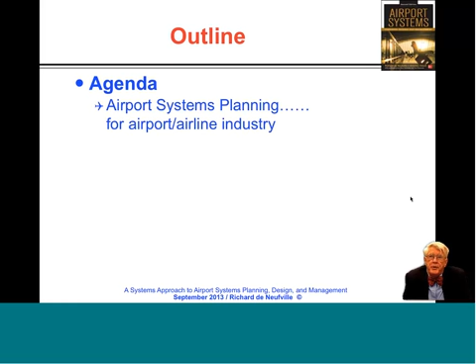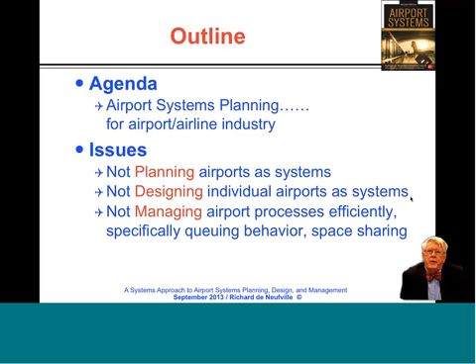The outline today is, first of all, I want to talk about the notion of airport systems planning for the airport airline industry, and cover several issues. The issues are basically that this is a field where they are not doing system design very much, and it's crying for your attention. In particular, they're not planning for airports as systems, they're not designing individual airports as systems, and they're not managing the processes efficiently, especially with regard to queuing behavior and space sharing. This is basically a field in need of a rethink, which is part of what my colleagues and I have been trying to do.

So the agenda item first of all refers to airport systems planning. Up there on the upper right-hand side, you have a picture of the book, and it's not so much the cover as it's actually quite thick. It's a wonderful book, keep your door open with it. It's a real door stopper, but it's trying to cover everything you want to know about airports and more.

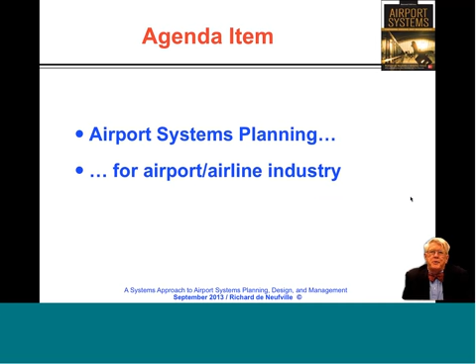So this particular one is a new text, in that it's the second edition, just came out in May. And it's new because it's about 50% rewritten from the original text of 10 years ago, and a lot has changed in the last decade. It's amazing how fast this field has been moving.

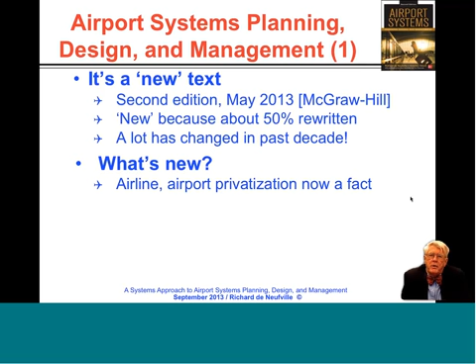What's new in particular is that airline and airport privatization is now a fact worldwide. This changes the game differently because the airlines now tend to compete on commercial bases rather than as an extension of flying the flag, whether it's Britain or Japan or France. And also the airports tend to have a completely different perspective when they run as businesses rather than government departments.

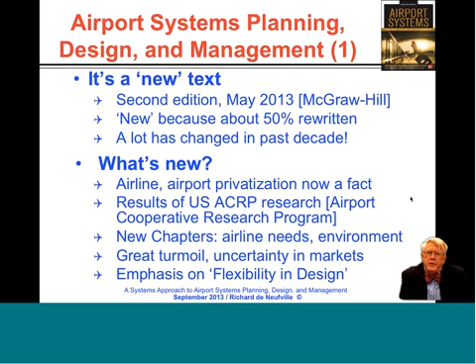There is also an enormous amount of recent research that's come out from the United States Airport Cooperative Research Program, and we cover also in the text new chapters on airline needs, the environment, and notice there's great turmoil and uncertainty in the markets. This whole airline industry is changing very, very quickly. And therefore, there's an emphasis on flexibility in design because we have to be able to have an agile adaptation to what is actually coming along, which was not the experience in the past.

So the emphasis now of the book itself, I'm going to talk a little bit about it, is on the systems perspective. First of all, among airports, it's now the case that airports compete globally with each other. So, for example, London competes with Dubai for the traffic going from North America to, say, India or Southeast Asia. You can either change in London to go somewhere, or you can change in Dubai. This competition between these cities several thousand miles apart was not practice before.

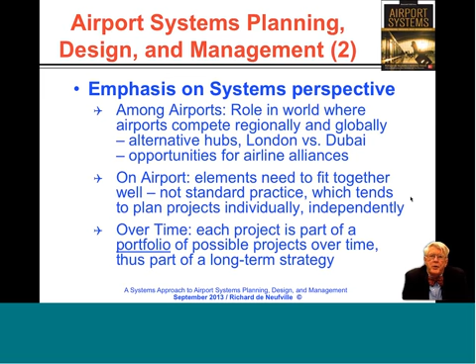Also, there are competitions on the airport. We need to think about how the pieces fit together, and this is where we need some systems thinking, because typically the plans, people have been planning projects individually and independently. And then in detail, we need to think about projects over time, as each project is part of a portfolio of possible projects.

Now, there's something about the title I'd like to bring out because it's indicative of the approach. It is Airport Systems Planning, Design, and Management. It's integrated. This is different from the usual thought where it's airport engineering, that's one kind of text, or airport management talks about them separately. But really, you want to think about all these pieces together.

So design is an extension of planning, that if you do a design right, you enable a range of possible choices. What you do not do is design something for one purpose only or with limited capabilities, and then you are stuck with a solution which doesn't work very well for the future, although it worked in the past. An example of that is Boston's own International Terminal, which does cater to international traffic and also to national domestic traffic, and it has a somewhat confused persona at various times.

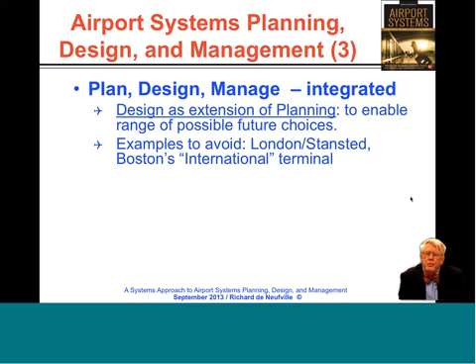Equivalently, the management and the design should be closely linked. That is, the capacity of a facility depends on how it is managed. Good management will reduce the time people have to stay in particular facilities and will therefore require less space, saving on construction and operations in many ways. There are various good and bad examples of that. Singapore is excellent, some others are not.

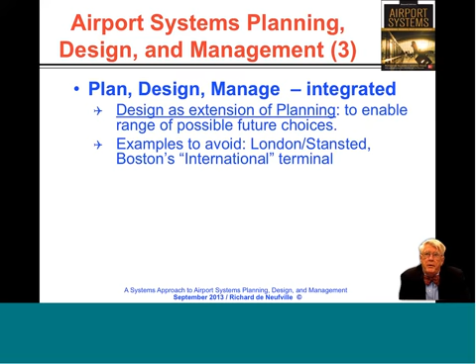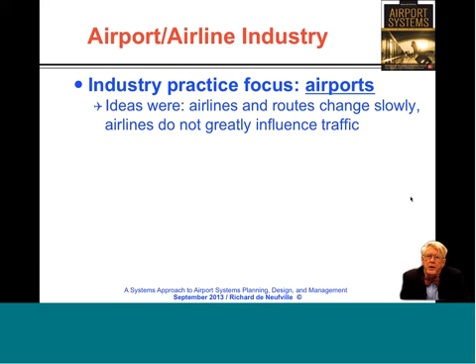I'd also like to note that we focus in the text, my colleagues and I, on not airports alone. That's the traditional approach, based upon the idea that airlines change their routes slowly, that airlines don't influence the traffic, and all you had to do is worry about the airports. The fact is the world has changed. Airlines are now relatively free to fly where and what they want to do. There are open skies agreements. There are alliances between airlines that make multiple airlines act together. There are low-cost airlines. So airlines really influence what's happening in the airports.

For example, Delta has recently quit Cincinnati as an airport. US Air abandoned its hub in Pittsburgh. TWA folded and has left St. Louis. What we need is to not think just about the airports, but to focus on the airport airline industry. That is, think of it again as a system, but not just as a physical system, but as the arrangements between the users seen globally, or at least internationally, not just on a particular airport.

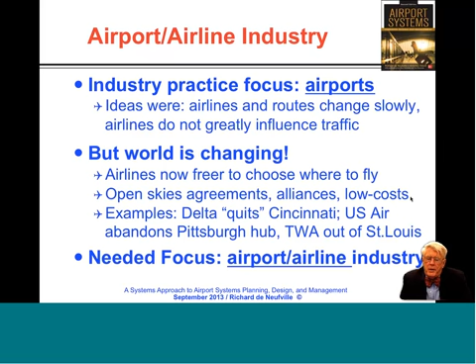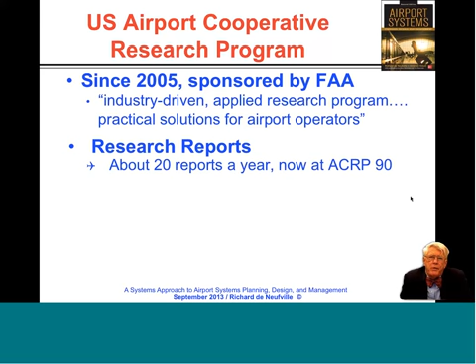Let me now mention also the U.S. Airport Cooperative Research Program. It's almost 10 years old now, and it is an industry-driven applied research program that develops a lot of practical solutions for airport operators. Now that it's started, it's issuing about 20 reports a year, and it has done some very good work.

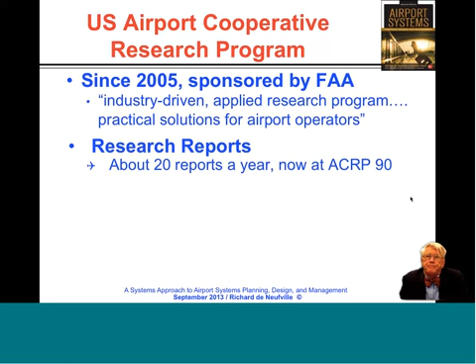In terms of the new chapters, one of the chapters we have is by our colleague Dr. Peter Belobaba from the MIT Aeronautics and Astronautics Department, and he is focusing on how the airlines are affecting the airports themselves.

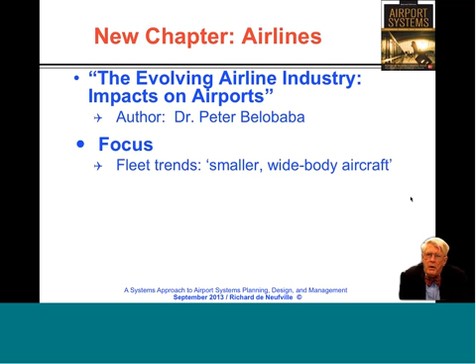One of the aspects is that you have trends in fleets to, surprisingly as compared to people thinking about it earlier, smaller kind of large wide-body aircraft, the Dreamliner for example, as opposed to the very large A380. This is so the airlines can offer frequency of services to more destinations. You now have a worldwide acceptance that connecting hubs is the central model for how airlines are going to be operating their networks. This has changed a lot.

It deals also with the importance of frequency in the scheduling procedure, and how that drives the choice of smaller aircraft, allowing the airlines to compete on frequency of service to various destinations. Big change in the operations in terms of faster turnaround times for aircraft, which means you need fewer gates. You get the airlines in the air more, earning money rather than sitting on the ground, and this changes the design of the airport passenger buildings and terminals. And, of course, you have a lot of consolidations and development of mega carriers that are influencing the costs and reducing the costs all over in real terms.

And all these changes mean that flexibility is a crucial aspect of system design for airports.

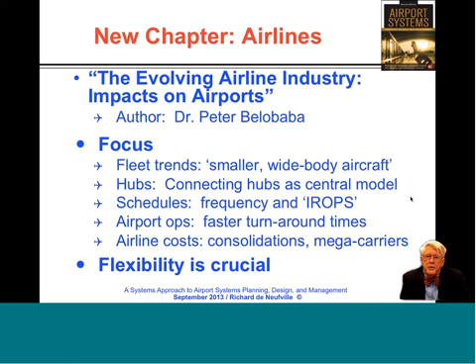Another chapter that's new is by our colleague Tom Reynolds, who's at Lincoln Lab these days. The focus has changed a lot. On the one hand, we now think about noise reduction in terms of having aircraft operate in particularly different ways than before, to reduce noise as they land and take off in terms of their flight paths.

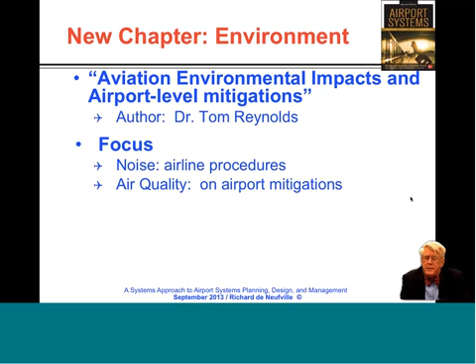A lot of emphasis now on air quality and the kind of things you can do at the airport to reduce de-icing fluid and oil spills and things of that sort. And there's concern also greatly about climate change, because airports are typically located in formerly flat, coastal areas, often previously marshy, as in Washington or Boston, and sea rise is threatening a number of airports in the United States and around the world.

In general, there's a shift in emphasis, which is less on noise, which has been a driver in previous years, and more on a variety of other factors that need to be taken into account.

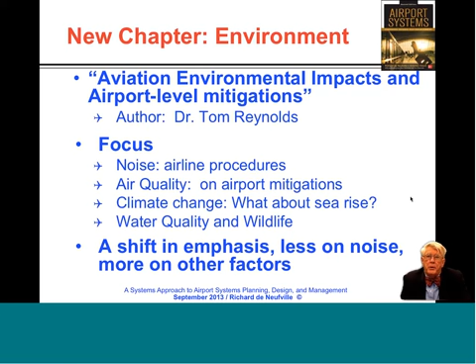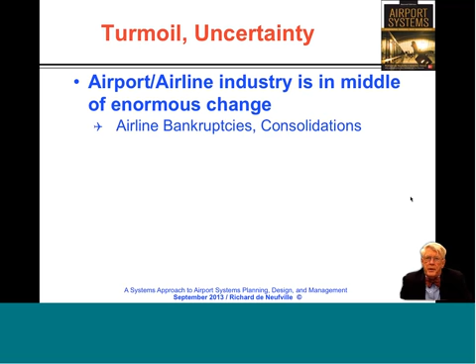Finally, let me emphasize to everybody the airport airline industry is in the middle of absolutely tremendous change. Airline bankruptcies and consolidations are the headliners here. In the United States, since we started deregulation in 1978, which puts us about 40-some years ago, we are coming, in some ways, to the end of the consolidations. There's very few airlines to merge with anymore.

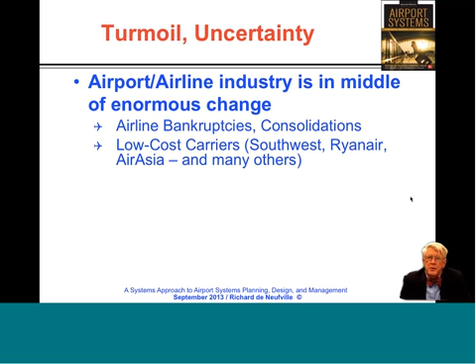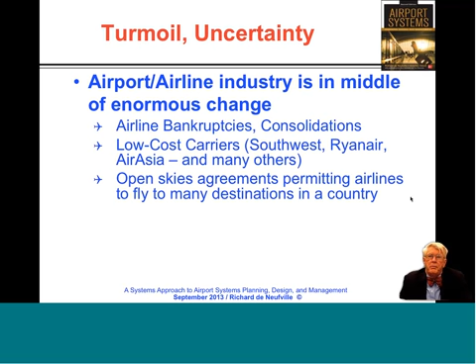But at the same time, we're having the development of all kinds of low-cost carriers, which are driving down the fares and driving the bankruptcies and consolidations and mergers of the major airlines, which we call the legacy airlines very frequently. On top of that, there are open skies agreements permitting airlines to fly to many different destinations in a country, so we have all kinds of shifts in route patterns and so forth.

So, for example, I mentioned Dubai as a competitor. The traditional route from Europe, the UK in particular, England to Australia was through Singapore, and recently Qantas decided to basically close its base in Singapore and reroute everything through Dubai, changing its pattern of flow. This is the kind of shift that is occurring, and that illustrates the kind of competition there is between airports widely apart in the world.

So the routes are really changing, and this can have a big impact on particular airports. The story here is that we really don't know what is next. Things are changing, and we need to be agile in our thinking, a theme that I've indicated already a couple of times.

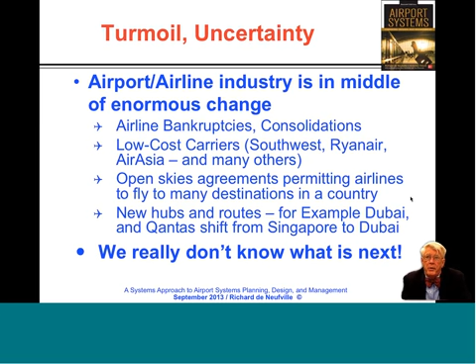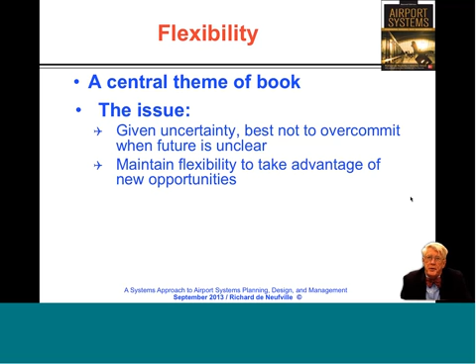So the central theme of the book is, in fact, flexibility. The issue is, given all the uncertainty, it's best not to overcommit when the future is unclear. Therefore, we should maintain flexibility to take advantage of new opportunities, and at the same time have insurance in the sense of the ability to avoid bad situations, to avoid downsides. That's in part stressing the idea that we don't want to overcommit and be left with big facilities that we then can't support because they are inappropriate for the conditions that actually exist.

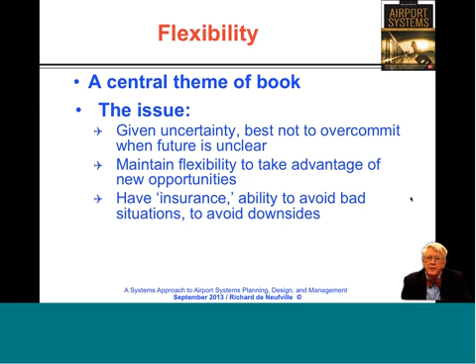A lot of this is drawn from the text I wrote with a colleague at the University of Cambridge, Stefan Scholtes.

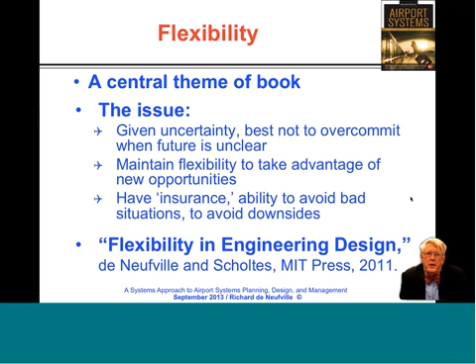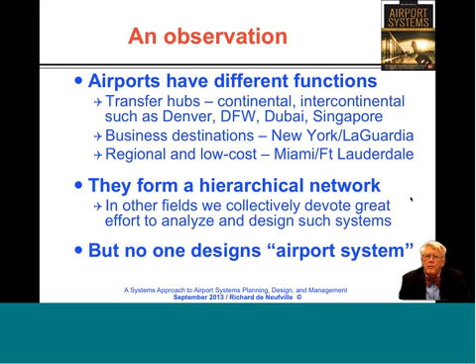Overall, it's a problem. So in the United States, we have something called the National Plan of Integrated Airport Systems, NPIAS, as it's commonly called. But it is really not a plan, and nobody's going to act on it. It's an inventory of assets. It lists all the substantive airports in the United States and indicates what they individually like to do, but it's in no way a plan of what will happen.

It's a plan of what various people's wishes might be, and it doesn't judge between them. So we really don't have any kind of national plan in the United States.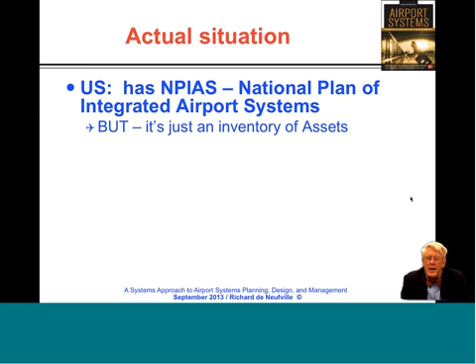We used to have such things worldwide, because in various countries, the national governments were in fact the airport developers. So Transport Canada played that role in Canada, and there was a similar organization in Australia. But these national roles have been devolved to local authorities. In Canada, you have independent authorities in Montreal, Vancouver, Calgary, Edmonton and so on, which do their own thing, and they're doing a very nice job at their own thing, but it is, again, not a national plan. And the same thing with Australia.

In Australia, it's a little bit worse in a certain sense, because whereas in Canada it's local authorities running the airports for the benefit of their communities or provinces, in Australia a lot of the ownership is in fact international, where the owners of Melbourne or Sydney or Brisbane care about running a business, but don't particularly care about the future of Australia from a local point of view. What we have, in fact, is a massive global business run at the retail level.

Uncoordinated plans by participants with minor market shares. In some ways, it's a mom-and-pop organization of a business. There are no big leaders with significant market shares who are organizing things, setting standards, or investing in research on how to operate and build efficiently. It's a lot of relatively small actors worldwide.

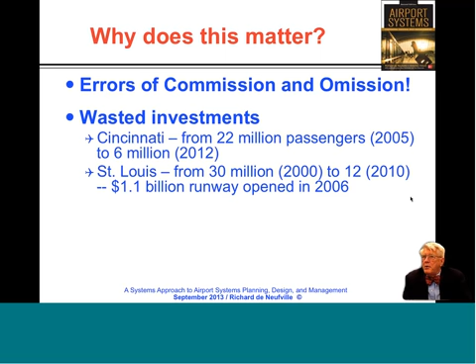But the errors also can be omission. So, for example, right now the UK, the English government, is thinking about how it would go about building more airport capacity for the London area, because its airports, by and large, like Heathrow and Gatwick, are filled to the brim, so to speak.

The sad part is that it is only now that this topic has really been considered, when capacity is already quite full. It will take them, if they manage to do it, a decade or more to get planning permissions, approvals, and do the construction. By that time, capacity will have been worse, and a lot of traffic will have been forced to move elsewhere, losing hubbing operations in the London area.

So in terms of competition with Dubai, or indeed Frankfurt and Paris, London will be behind. It's inadequate forward planning at a national scale.

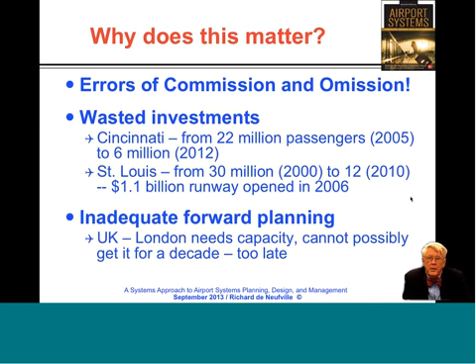So what would be desirable? It would be desirable if there were major airport groups that could create coordinated systems of airports with economies of scale. Instead of having small local organizations important to their own area but mom-and-pop scale globally, we could have larger entities to do this in a coordinated fashion.

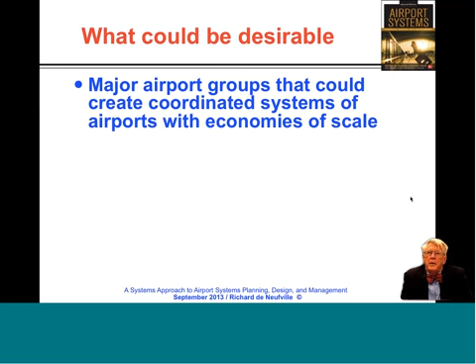So there is one, FedEx, the cargo carrier, which in fact is probably the most valuable and largest airline in the world in terms of aircraft and movements. You don't see it very much because you're not a piece of cargo and you don't fly overnight to Memphis to get sorted out to go somewhere else.

But as a shipper, being such a major force, it has established a chain of airport assets, built largely to its own specifications. In order to run its business, it has created a network of coordinated facilities which it basically owns and operates at various airports. So this is one kind of model that might develop.

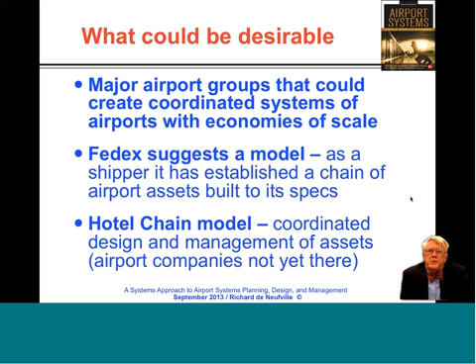Another model, which hasn't occurred here anywhere, is in some ways a hotel chain model. That is, there's some entity that has coordinated design and management of assets. Think about your favorite hotel chain, Hyatt, Sheraton, whatever you'd like to mention—they run thousands of properties around the world, or at least a thousand, and have done so in a way to really make sure that new properties are done with a system design.

They have economies of scale, and they don't have to own the properties themselves, but they operate them very efficiently. Whether you like their service or not is another issue, but they're certainly efficient compared to individual hotels each trying to do it their own way. It could be possible that airport companies could do such a thing, but we're not there yet in any way. We haven't developed the Walmart of airports—the company that will be efficient and deliver services at much lower prices than traditional arrangements.

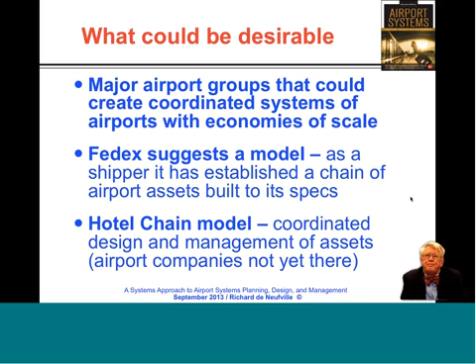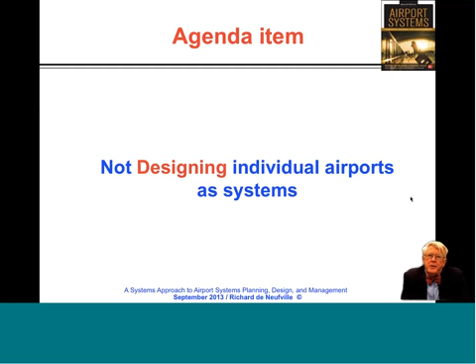So let me move on to this notion of designing individual airports as systems. Again, this is not particularly done. The observation here is that we're in a business where the design loads on airports are common internationally.

Whether you are in Boston, Dallas, Singapore, or Dubai, we're using basically the same kind of aircraft—Boeing or Airbus, and maybe some others like Embraer or Bombardier at smaller airports. The people and bags are pretty much all the same, about the same size, fairly standard. So it's a common kind of load, and you'd expect that with facilities having the same kind of loads, you might find the efficient solution and design accordingly.

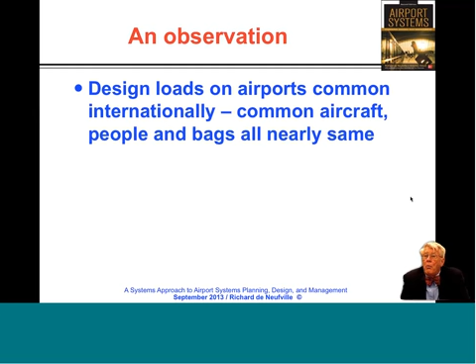When we talk about runways, these are very standardized, governed by the International Civil Aviation Organization, part of the United Nations. Whether you are in Argentina or Armenia, they're basically designed to the same kind of specifications. There are some marginal differences, but it's a fairly standardized activity, and everybody basically knows the rules.

However, when you come to passenger buildings, the investment in these is generally larger than the investment in runways themselves these days, or has been for some time. Everything is different—there's no standardization, everything is custom tailored, there are no real efficiencies. It's a system waiting to have a system design and management.

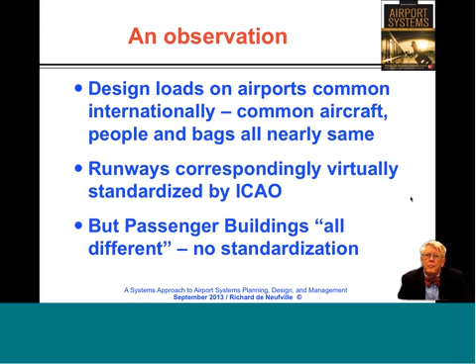The traditional approach is that almost every airport building is original. Everything is different.

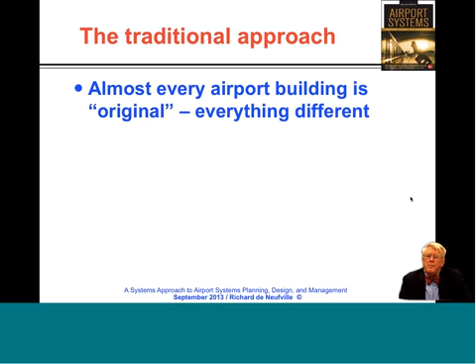What typically happens for any project is they have some kind of design competition and select an architect, and particularly for the major airport, you have signature architects who are internationally famous. They vie to see who could have the most fascinating, interesting design, so they can be reported in the architectural magazines. They are all custom tailored, typically quite expensive because they're one of a kind, and people have to learn how to build them.

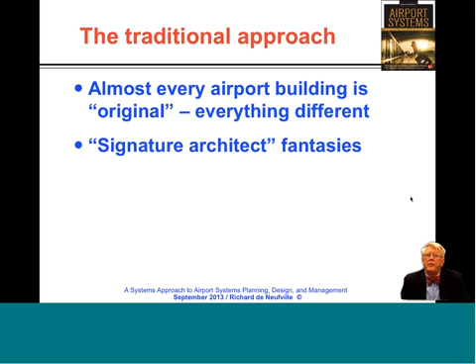In this context, there's a lot of attention to roof lines, the kind of thing you can see when you're in a helicopter hovering over the airfield, but you do not see when you're inside. Or they love attention to one-of-a-kind custom interiors, but none of it is really focused on efficiency or operations in the short or long term. They come in all shapes and sizes and interior conveyances. They also favor local suppliers, so they can give local producers of equipment their own chance to be seen.

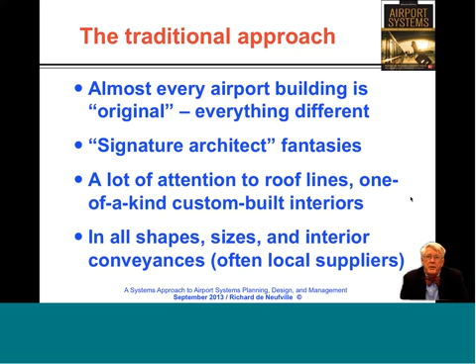All this is very good, but it means that they are, in effect, reinventing the wheel. And as they're doing it, since they're not typically very experienced in doing airports because they don't do very many of them, they make all kinds of mistakes. So let's just take a look at some of the possibilities that we have here.

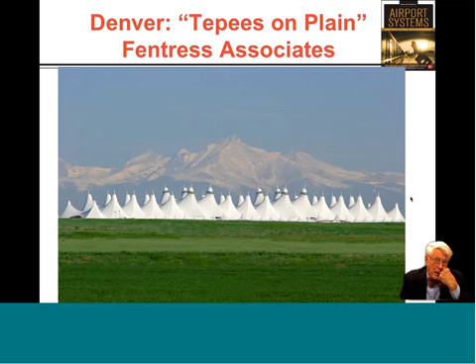So this is Denver. Tepees on Plain. Now, actually, it's part of a runway, but they've taken the picture from the site boasting about it to emphasize how it is not an airport, but it's tepees. Because of the various elevations between where this picture is taken and where the building is, which goes for several stories underneath these tents, which is the roof line, there are some runways, but this is to give you an idea of what they are designing for. Tepees on Plain—it's not efficiency of airport operation.

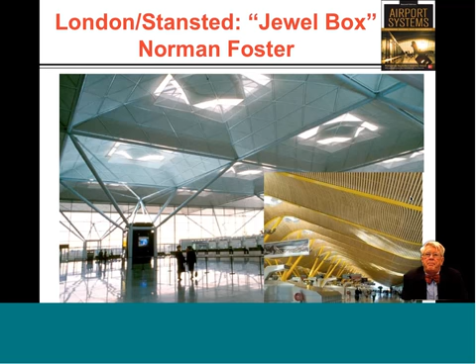Here's another one, by his competitor, his British competitor, Richard Rogers' design. This is at Madrid. It's all about the roof. You can see, or mostly you can't see, on the bottom level where your gate is, because there's all that stuff going on inside, and it's quite confusing. In fact, it's so confusing that, last time I was there, they had a large number of employees in yellow jackets giving information because so many people were getting lost that they had to have people redirect them in various places. It's a wonderful roof, and again, one of a kind, and you can imagine this is expensive construction.

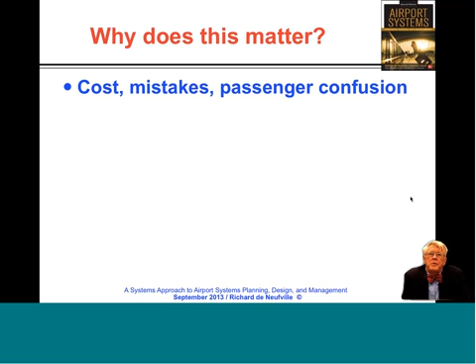So why does all this matter? The buildings are arguably wonderful, but why does this matter? Well, it matters because it can be extremely costly, because when you do something for the first time, you often make mistakes, and because it's very confusing to the passengers. There's no learning—there's no 'I did it this way once, now I'm doing it a second time, I can do it better.' There's no economy of scale, and the structures are difficult to build.

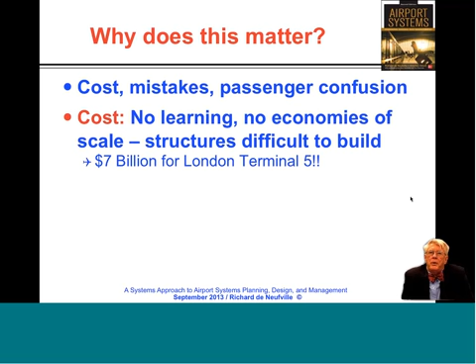For example, Terminal 5 at London, the latest building there, cost $7 billion. Just by comparison, the construction of the entire Denver International Airport was about $3.5 billion. So you can imagine how expensive this is.

Mistakes. So Denver itself wanted, again, a unique system. It was an automated baggage system. It delayed the opening of the airport by 15 months. During that time, it cost the airport $30 million a month. This is the interest on the capital that they couldn't recover, and of course, keeping the building warm and clean. Altogether, this innovation cost them about $500 million in round numbers because they wanted to be unique.

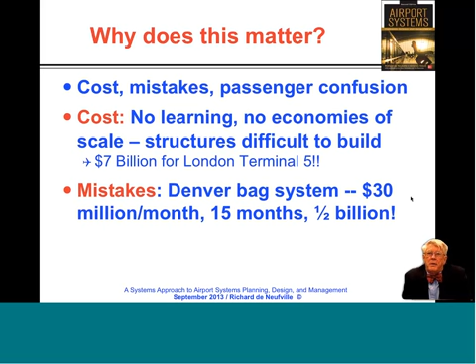Also, it leads to incredible passenger confusion. It's confusion in part because every time you come to a new airport, you don't have very much to go by because things are all different. It's hard to know what to expect. It's not like going to some facilities where it's the same kind of thing. Most everywhere you know what to expect and find your way around.

This is not the only example, though. At Frankfurt, I made a similar calculation or estimate, the kind of thing I do when I go through airports. Coming from the suburban train to board an aircraft in Terminal 2, I changed 17 levels. I had to go down underneath the roadway, then up 4 levels to a train between stations, then down to the check-in, then up several levels to the departure level, then down to the runway level from that place, and then up into the plane. All in all, I counted 17. I may have missed one or overcounted one, but these are the kind of thing where it's very confusing.

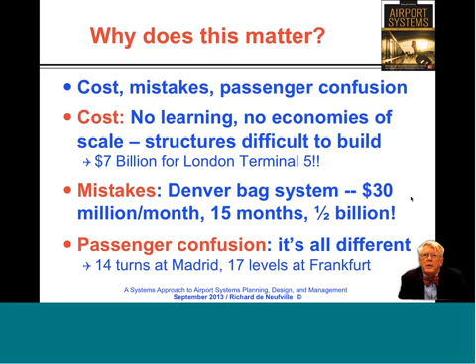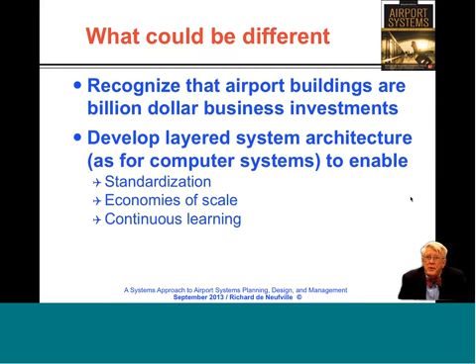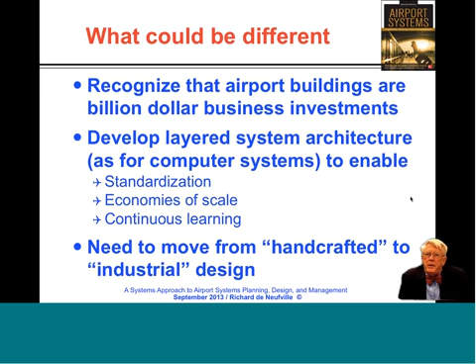So what could be different? What could be different is to recognize that airport buildings are billion-dollar business investments, that we should develop a layered system architecture, as for computer systems, to enable standardization, economy of scale, and continuous learning, and we need to move from a handcrafted to an industrial design. That is, from everything being handcrafted, bespoke tailoring, to some kind of common design.

Now let me close with some discussion about the management aspect, in particular talking about queuing processes and space sharing. There are two observations I bring here. One is queues, that there's waiting and congestion everywhere. The second aspect is, while there's waiting and congestion because you're trying to get the service you'd like to have, to check-in, security, gate processing, whatever, much of the airport building is unused most of the time. That's the remarkable thing, that a lot of it's not busy while you are in a busy queue.

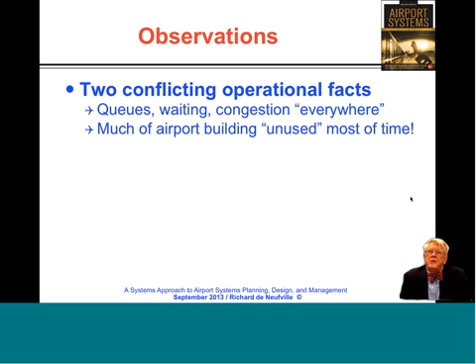Now, you know what I mean by queues, you've experienced them a lot, I don't have to describe them more. The other one, though, I draw your attention to, because you don't see it since you're generally in the busy portion, is that the peaks at check-in for different airlines and services are at different times. So while one aspect is busy, the one you're probably in because, like most people, you're going at busy times, other ones - gates, gate lounges, security checks - are not busy. They're actually quite empty. So at any time you have a lot of idle facilities in the wrong time and place.

Somehow, the personify quit unexpectedly.

So you've missed my pretty face, but I hope you can still see the screen.

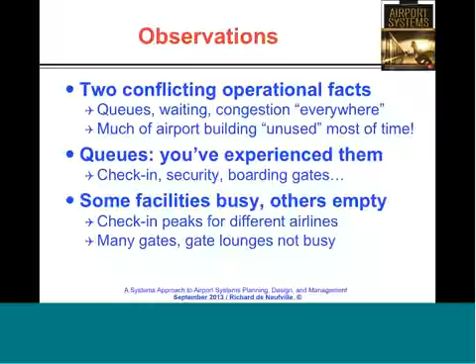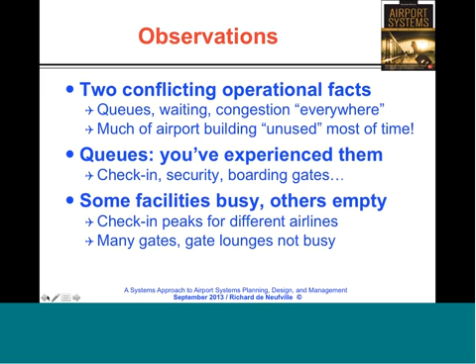What's that? We'll do without it for the remainder. Okay, you've seen it once. 2 seconds of my face is enough for anybody.

But here we go, so let me move on. Why does this happen? Let's talk about the queues. One reason you get in these queues is there's a misunderstanding and poor management coordination—first of all, a misunderstanding of capacity. We can talk about the nominal capacity of what a process can deal with if everything's working very smoothly.

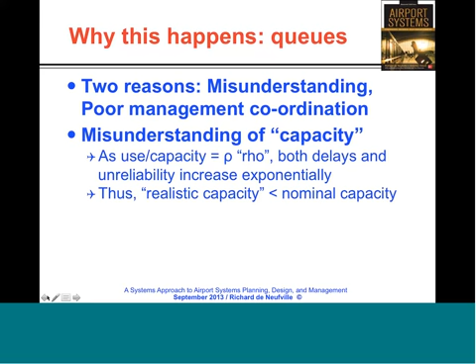However, if we take the ratio of the actual use as compared to the nominal capacity, which traditionally has the symbol rho, what happens is that the delays and unreliability increase exponentially. There might be a nominal capacity of 1,000, but the realistic capacity may be considerably less. This is what a lot of designers and operators don't think of. They say, let me just have the right number of servers, whether it's TSA officials or whatever, to meet the average load, but almost by definition you have the wrong number when you do that.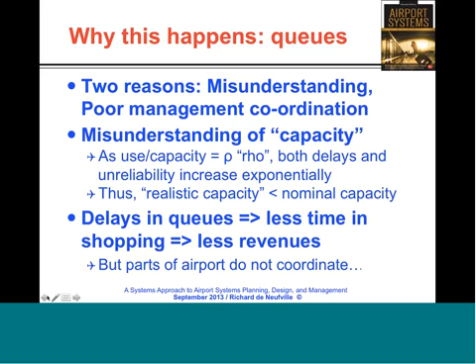Part of the management coordination issue is that you have all those delays in queues, which means people have less time after the queues or for shopping, and the airport has less revenue. It would make a lot of sense for airports to speed things up so people could use their services and enjoy them more. But the fact is the various parts of the airport do not, in general, coordinate very well. There are all kinds of institutional reasons for that. It's not that people don't understand the issue, but it's not addressed very successfully in many places.

Moreover, for queues, there's also a direct relation between the speed of processing and the space needed. The faster the processing, the less waiting in line, the less space needed. So if you don't have a queue, you don't have a lot of people lined up, and you don't have to provide a lot of space for them.

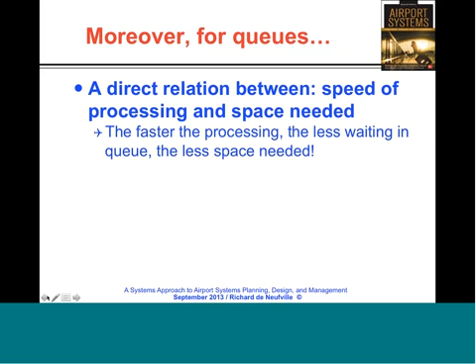This also means that now that we have more automated check-ins, people come to the airport with their boarding passes and everything—they don't need to check in—so the old check-in counters with lots of space in front of them are often empty simply because the process is speeded up and they don't need that space anymore.

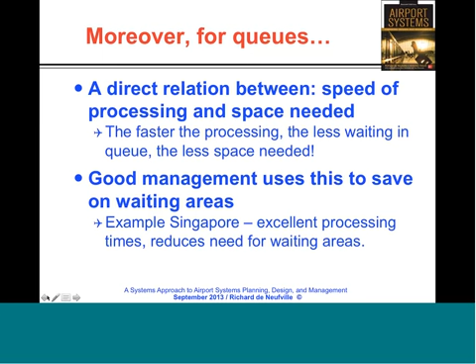So good management uses this notion to save on waiting areas. For example, in Singapore, they have excellent processing times and much smaller waiting areas, which reduces cost besides making things more enjoyable for you.

Now there's also this notion of empty space—the usual practice is to size each element of the airport building separately. So they ask how much space is needed for the lounge, how much for stores, how much for corridors, and they add all this up.

So for 1,000 passengers, they allocate space for 1,000 passengers at the gates, and for the percentage that uses the stores, and so forth. But any particular person only uses one space at a time, so there's enormous double counting. Also, the needs arise at different times—while one aircraft is boarding with a lot of people waiting, the next flight across the hall isn't boarding yet and doesn't have many people. So there are big opportunities for different functions to share space.

Depending upon the situation, savings of up to 50% are possible in many cases compared to what is actually done.

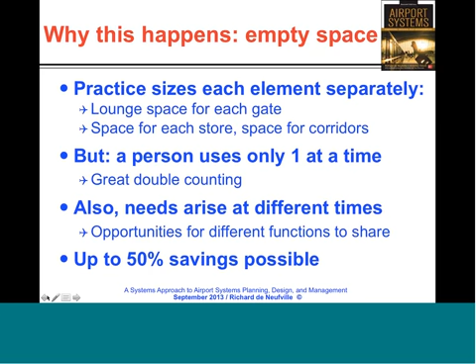Let me now give a good example of airport system design to show the kind of thing that can happen. This is Terminal 5 at New York Kennedy Airport, a JetBlue terminal. It cost about $750 million, has 25 gates, and had very extensive system planning, design, and management. There may be something equivalent elsewhere—I don't know of it yet—but this is a very interesting design.

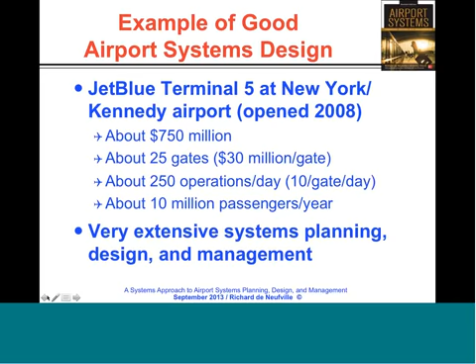Now here's a plan, and what you might observe is in the light green inside the building—these are lounges, which, for example, looking on the far right-hand side, you have 5 aircraft positioned.

They're all sharing the same place. It's an easy thing to imagine, and you've seen examples of that in a number of places. But what it means is instead of having 5 times the lounges required for one aircraft, you have about half of what it would otherwise be calculated. It's really common sense, often not done, but done here very nicely. So common lounge areas, and the whole space of this is very efficient. But that's not all.

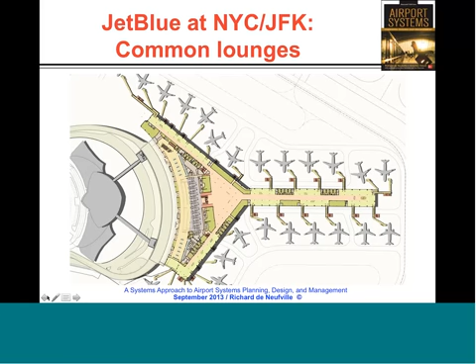So you have a common use of lounge, shared space, business area, and everything all in one place, meaning that it is, in fact, very economical in terms of overall space provided. And when you consider that the space for an airport easily costs something on the order of $1,000 per square foot, in terms of all kitted out, this can lead to a great deal of saving.

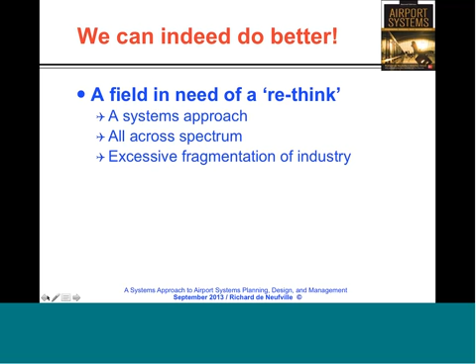So I'd like to close now and leave a chance for questions that might arise. But the whole point is that we can do better. This whole business of airport planning, which my colleagues and I would prefer to call airport systems planning, design, and management, needs a rethink. It needs a systems approach all across the spectrum, and we need to get beyond an excessive fragmentation of the industry. It probably needs some kind of reorganization in many ways. This is obviously going to take time, but our job in some ways is to look ahead to the future and not to be stuck in the past. Thank you very much for your attention for these last minutes.

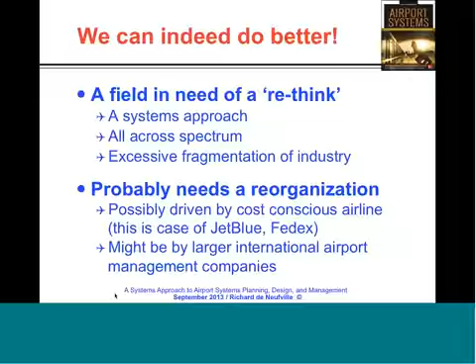From James Murphy: Seems like you address the need for efficiency and cost savings, but the desired state of many airports is uniqueness. What are some of the major beneficial goals and objectives that could be the drivers to doing a systems approach rather than turning art-oriented facilities, as you just mentioned, for today's airports into Walmart-type facilities?

One of the things happening at airports is that low-cost airlines are, to some extent, tending to drive the new designs. I say to some extent because it is not widespread, but the fact is that low-cost airlines, which have traditionally been seen as marginal, are now becoming very important. Southwest Airlines, for example, is now by far the largest carrier of domestic passengers within the United States.

So one of the things that airlines such as this do when negotiating with airports as to whether they will fly to a place, or under what terms, is to insist upon more efficient services. In many ways, I think this is where it will go - cost-conscious airlines basically saying that if you want our business, you will operate in a way that reflects this cost consciousness, and you'll design to our requirements and our standards. This is the situation, I think, which will be coming to pass. It's not there yet, but I think that will be the driver.